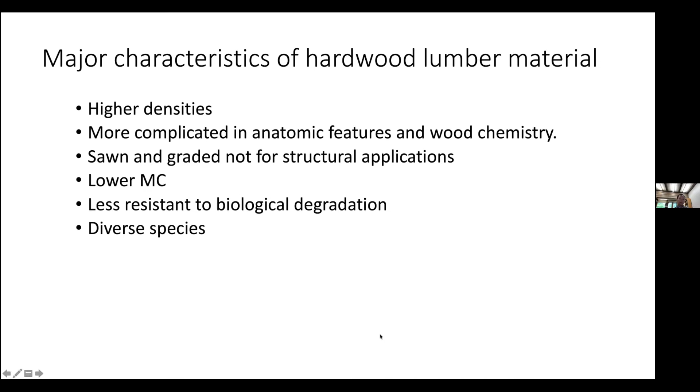The other important aspect is the diversity of species. Many hardwood species are in the forest. It's not like softwood species, which can come from plantations, single species. These are the things we have to be considering when we talk about using hardwood species in CLT production.

Okay, so all these characteristics of hardwood lead to some technical challenges. I already mentioned some of them. So just to list some of them here, we think it's very important. Before we can actually produce hardwood CLT, we need to address these problems. One is the bonding issues. This is related to the higher density, the chemistry and anatomical features of hardwood species.

We know that bonding hardwood species can cause some issues just from previous studies, but we haven't actually thoroughly studied this, especially when you combine lumber, not small pieces or veneers together. It's totally different. Okay. The other thing is how we're going to relate the mechanical properties to the grades, since hardwood lumber is graded visually, right, for appearance applications primarily.

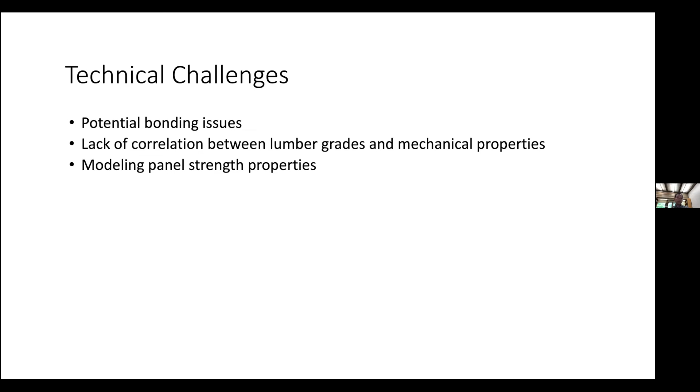Okay. And the other one is modeling the strength properties. This is related to the variation of the materials. More types of cells in the wood, more variations in the properties of the wood, that kind of thing. So we basically targeted our study on these challenges.

The one thing we are focused on is multiple species, considering what we have in the forest, the composition of the forest. And we believe multiple species is the way; no single species can actually supply enough wood for production of hardwood CLT. Okay, so with that, we specifically studied the effect of wood species on the bonding performance when we cross-laminate hardwood lumber.

And the other one is that we evaluate and model some panels. So we made some panels and broke them and saw where their mechanical properties are, compared to the other types of CLT made of other species.

So for the study on the effect of wood species, we chose 7 hardwood species. They're all from the lumberyard, commercially available hardwood lumber, and we also included 2 softwood species, which are very common in this region. And so we have 9 species.

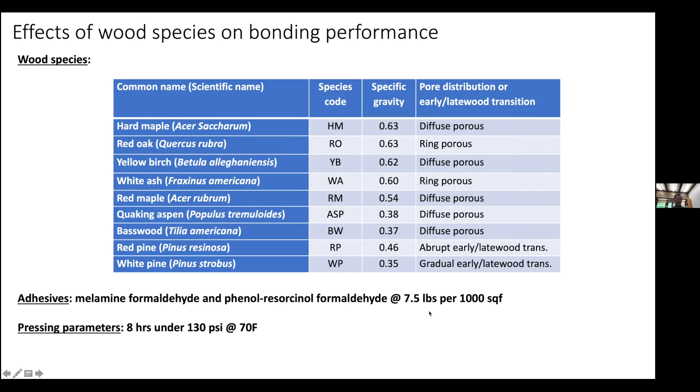And the question we ask is: can we make good hardwood CLT panels when we use the existing manufacturing conditions designed for softwood CLT? That includes adhesives, the adhesive application rate, pressing parameters like the time, temperature, that kind of thing. So these are all factors we fixed, right, in order to study the effect of the wood species. All these parameters you see here are actually designed for softwood species.

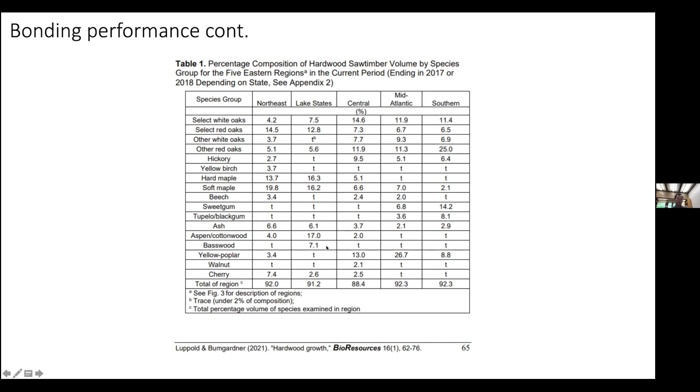Okay, so I want to put this slide here because this is a new publication this year, talking about the composition of the hardwood sawtimber. If you look at the Lake States and the species, our selection actually was pretty representative of what we have in the forest in this region, especially some species with larger composition here. We see the red oaks, the hard maple, soft maple, basswood, cottonwood, aspen. These are all included in the list of the materials.

And so we studied 2 major aspects in terms of the bonding performance. One is the bonding strength. We use ASTM standard D905 to characterize that, and then we also study the delamination of the bonding. Okay, and that's the AITC standard.

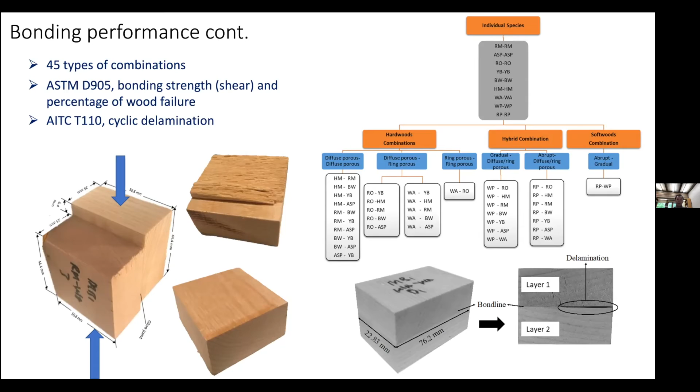The delamination test basically means the specimen goes through dry and wet cycles, and then we measure the delamination of the glue line, the ratio of that. So we have all the possible combinations, 45 types of combinations with all 9 species we selected, and we studied that. And what we found out, when we combine each individual species, for example aspen with aspen cross-laminated, is that only 3 species actually pass the standard requirement.

They're red oak, basswood, and white ash, in terms of the strength, especially the wood failure rate. There is a 75% wood failure rate requirement per ASTM D2559. The other species like aspen or hard maple either failed one of the adhesives or both adhesives. So only red oak, basswood, and white ash passed the wood failure requirement. Okay.

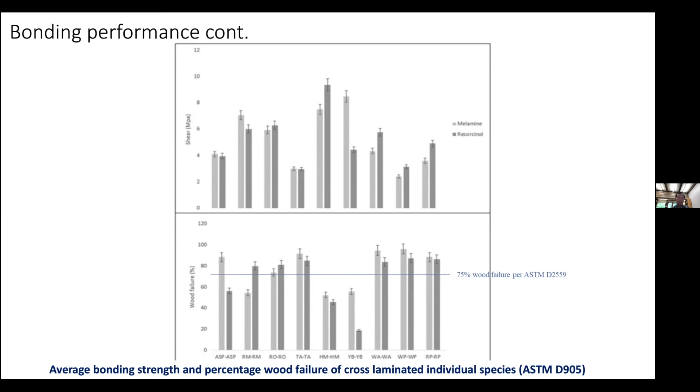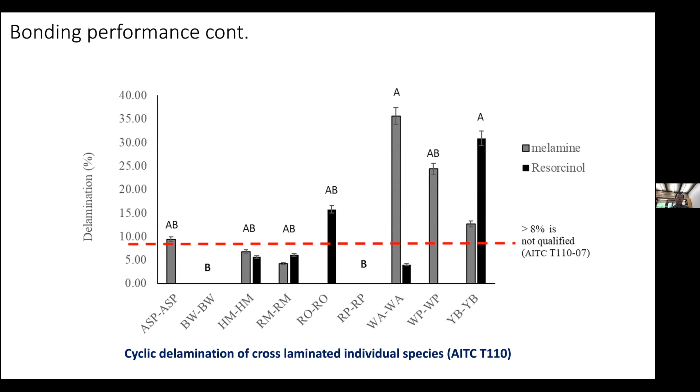And for the delamination test, AITC T110, this standard requires the delamination to be up to 8% for hardwood species. For softwood species, the number is 5%. So we see that basswood, hard maple, and red maple, these 3 species pass the delamination test requirement. The other species either failed one adhesive or both adhesives.

Okay, so when we combine these two together, what do we get? The result is that for hardwood species, basswood actually came out as the champion from the list of species, and yellow birch didn't perform very well. It basically failed everything, yellow birch.

So the other species, red oak, white ash, and red maple, they are doing okay. And the hard maple and aspen, they failed the wood failure rate. That's kind of confirmed with these being the diffuse porous species, hard maple and aspen.

The previous study on yellow poplar at West Virginia University had a low wood failure rate in their yellow poplar samples as well. So we kind of confirmed that the diffuse porous samples have to have special consideration when we use those species for CLT cross-lamination.

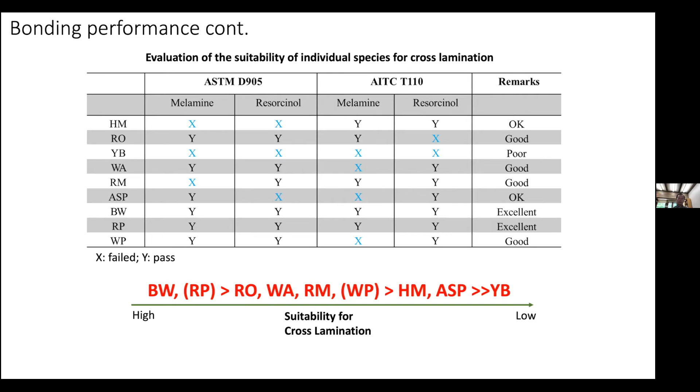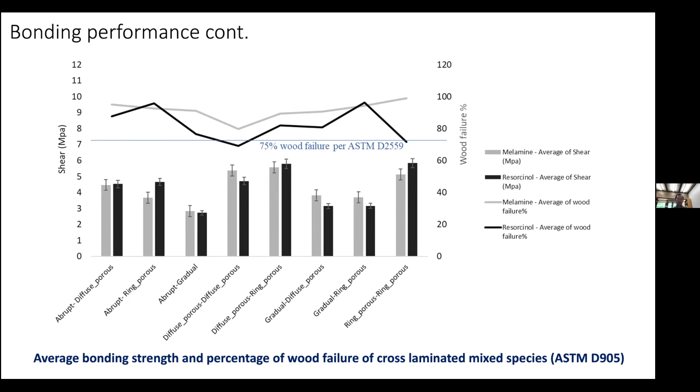And if you look at the delamination test for each specific combination, we see that some species wouldn't pass the test if glued individually. For example, yellow birch wouldn't pass anything. But when we combine it with another species, for example yellow birch with red maple, they can actually pass all the delamination requirements. For the red maple yellow birch combination, the average with resorcinol is higher than with the melamine-based adhesive, but still below 8%.

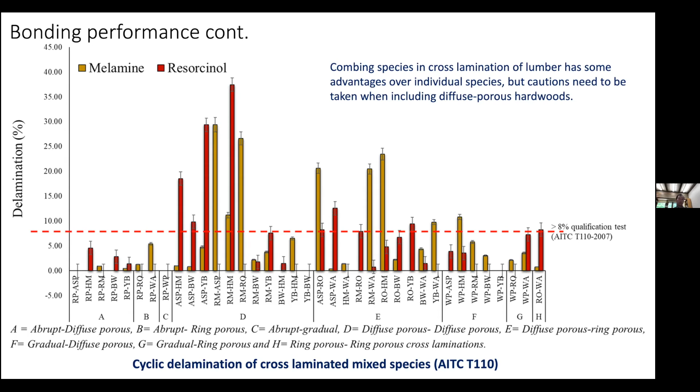So the result from the study is that combining species in cross lamination of lumber provides some advantages over just using individual species. But when we use diffuse porous hardwoods, we should pay specific attention, because they can potentially cause some issues. So basically what we learned is that the better way to use hardwood species in cross lamination, for example cross laminated timber, is to combine different species together, so that the overall properties of the cross laminated material will be improved. So that's the bonding performance.

Another study we did was to make some CLT panels and break them, to see how the mechanical properties compared to softwood species or other hardwood species. Since we don't have mechanical properties directly related to the grading system, we used a non-destructive evaluation called the E-rating method to rate the boards we used in making the CLT panels. We randomly chose about 1,000 boards from 7,000 board feet of lumber. They are all 4-quarter sugar maple lumber.

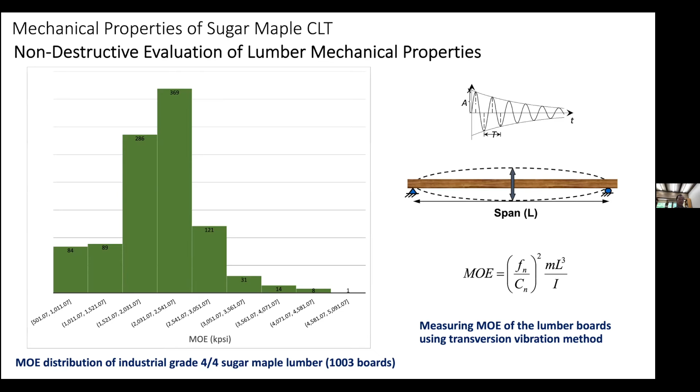So we did a test and got a distribution of the MOE from the non-destructive method. It's a dynamic MOE, very close to the static MOE, which we would use in the calculation or simulation of the panels. We divided these 1,000 pieces into two groups based on their MOE. If the MOE is greater than 2 million psi, we call it high grade, and if it is less than 2 million psi, we call it low grade. So it's H and L.

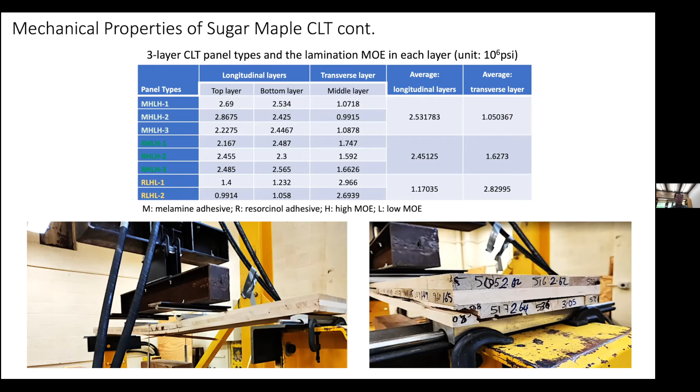We combined them using two types of layups. We put 2 high grade layers in a 3-layer panel, and the other way is to put 2 layers of low grade in the panel. And we used 2 types of adhesives. You can see this table here. M means melamine, so MHLH means melamine adhesive glued with 2 high grade sugar maple layers on the top and bottom, with 1 layer of low grade in the middle. That's one type. We made 3 panels of the first type, 3 panels of the second type, and 2 panels of the third type, using resorcinol adhesive. And we did the bending test.

Jumping to the results, we found that the MOE of the panel can be up to 35% higher than the best grade in the standard PRG 320. And what's even more impressive is the MOR. It's at least 5 times that of the layup with the highest properties in the standard.

And we also compare this to some other panels, 3-layer, for example, Southern Yellow Pine. So we found that the MOR is about 4 times higher than Southern Yellow Pine, and the MOE is about 2 times. Okay, and we'll also compare these results to the yellow poplar panels made at Virginia Tech. So that's even better. The MOE is 30% higher than yellow poplar, and the MOR is 9 times higher than yellow poplar. Okay, and this sugar maple we're using is the industry grade sugar maple.

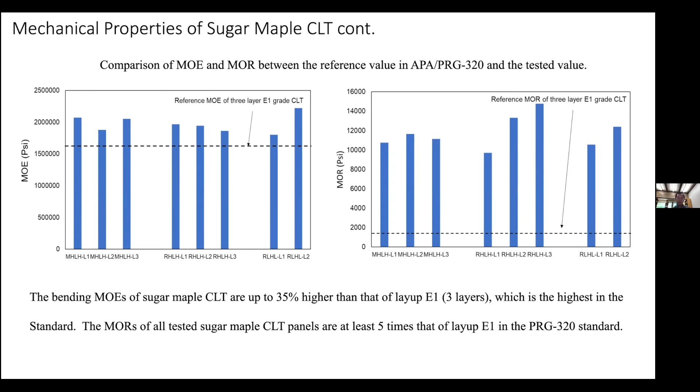Okay, so another study we did was to combine sugar maple with white spruce, to figure out if we combine softwood and hardwood, make it a hybrid panel, what that's gonna give us. We also did 2 types of layup. One with 2 layers of strong wood, the sugar maple, and 1 layer of spruce, the low density, lower mechanical properties. And the other type is 2 layers of spruce and 1 layer of sugar maple. So these letters here, SHS, stand for softwood hardwood. S stands for the softwood, which is the spruce, and H means the hardwood, which is the sugar maple here.

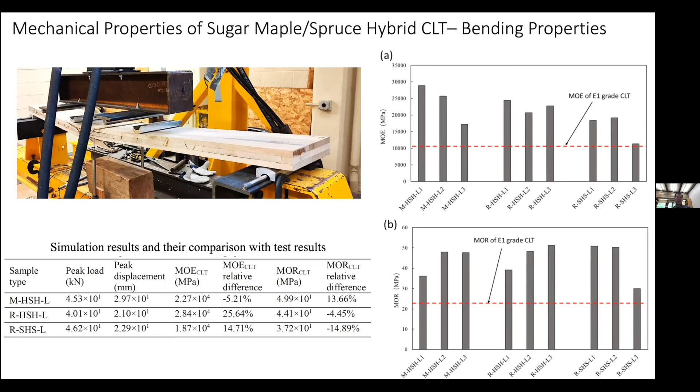So we can see that even with 2 layers of spruce in the major force direction, the MOE is still on average higher than the highest grade in the standard. Okay, and MOR also is higher than the standard. And the thing is, if we just use spruce, the grade we are using in this study will not get you to the E1 grade CLT at all. So if you replace at least one layer with sugar maple, that will give you a panel that is probably higher than the highest grade in the standard. So that's the point.

So the other thing we did is we tested the shear property with this hybrid panel. With 2 layers of spruce in the major direction and 1 layer of sugar maple in the minor, cross direction, the modulus of shear is close to the E1 grade in the PRG 320. But if we have 2 layers, it's obviously going to be much higher than the E1 grade in the standard. Okay. And the shear strength, no matter how the layup was, is much higher than the E1 grade.

So with this, the major information from these studies is that using mixed species is feasible, and probably it should be the way to go when we use hardwood species in cross-laminated timber products. And we also confirmed the superior mechanical properties everybody was talking about when we use hardwood in the CLT. So go back to what we discussed about making hardwood CLT and producing hardwood CLT.